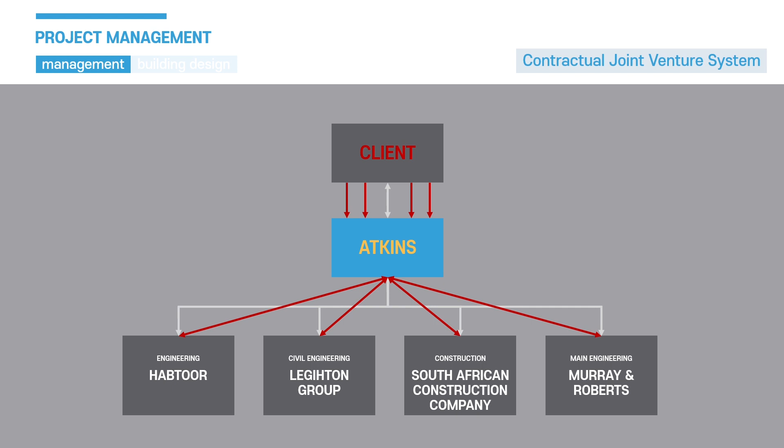However, the client is not only involved in the construction process through Atkins, but also in other joint ventures individually. This causes the scope creep phenomenon. Scope creep refers to how a project's requirements tend to increase over a project life cycle. The client wanted it to be completed before the year 2000, so the architect wanted the same. But if scope creep occurs, it cannot. As the construction period was set, it could have a huge impact on completion.

The second is about realization of design. Architects have knowledge of basic structure, but it is sometimes difficult to actually calculate and design the form. So architects and engineers must constantly compromise on this issue. Because of its unique form, Burj Al Arab had a series of these problems during construction. The architect expressed the yacht in the simplest form.

In the initial model, there was a high probability that the shape of the structure would be modified by wind. Therefore, it needed a structure to respond to wind load. Through consultation, architects and engineers implemented structures that can prevent wind load deformation and rooftop structures that can maintain them. The design is based on the frame that holds the sail of the yacht.

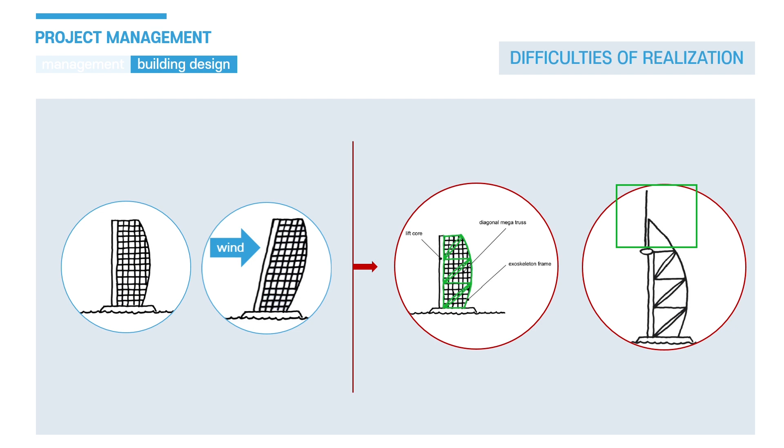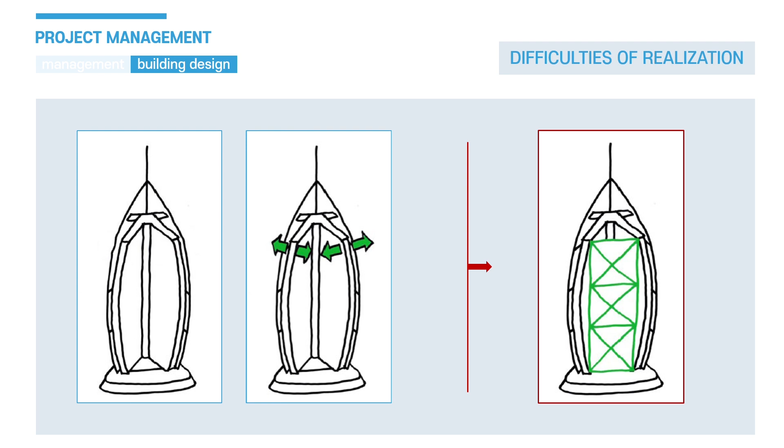The front part of the building was also implemented in a simple form, but it also threatened to deform because of wind load and the weight of the building itself. Therefore, the rear bracing frame was installed to stabilize the structure.

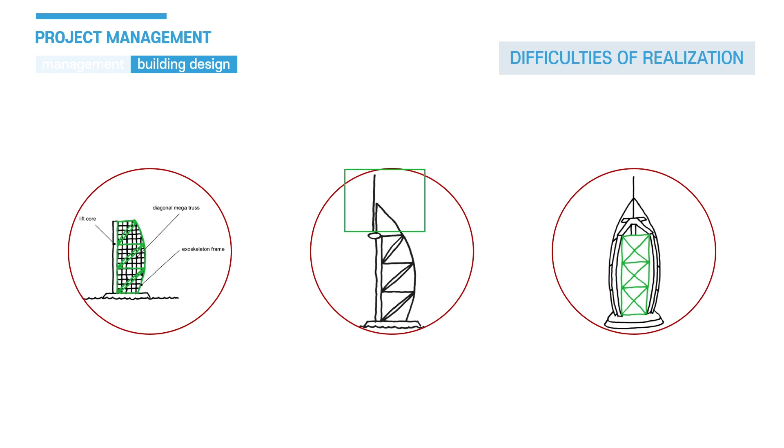As shown above, intuitive problems could be changed by modifying the design prior to construction, but most couldn't. There are many other problems while explaining the construction process during this semester. But Burj Al Arab's construction period was not enough, so Atkins used the fast-track method. To solve this problem, the architect used the fast-track method.

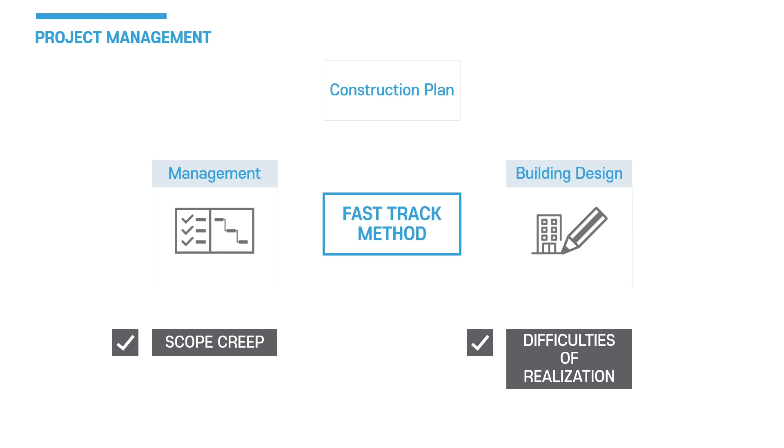Fast-track method is a construction method in which the design drawings are not completed for the purpose of shortening construction period, and the next stage is designed and construction is carried out according to the completed design. Originally, after the basic design, problems are corrected to complete the design, and then construction begins. But fast-track method is to perform main design and construction simultaneously.

Due to the lack of construction time, Tom Wright needed to work on it first and then design and construction at the same time. Fast-track method is effective in reducing construction period. It is also a good point of view to look at the use of fast-track method in the actual construction process. Now let's move on to the construction part.

Construction started with building the artificial island. Constructing the island had three major problems. First, the architect and the engineers clashed over whether there must be an artificial island or not. Eventually, it was built following the client's decision. Second problem was the danger the island had.

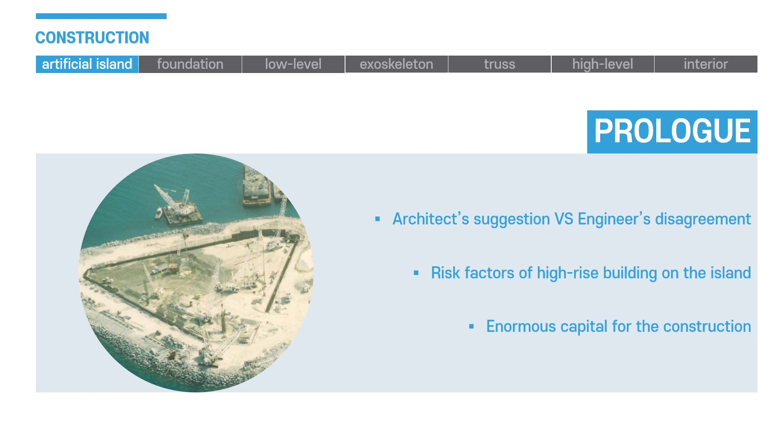Building an artificial island 207 meters off the coast and building a high-rise hotel on it had lots of risk factors, such as the destruction caused by either a wave or the structure. Lastly, they needed an enormous amount of money. Building the artificial island cost 3 years of the total 5-year construction period, starting from 1995. The island is constructed 207 meters offshore in 6 meters deep water.

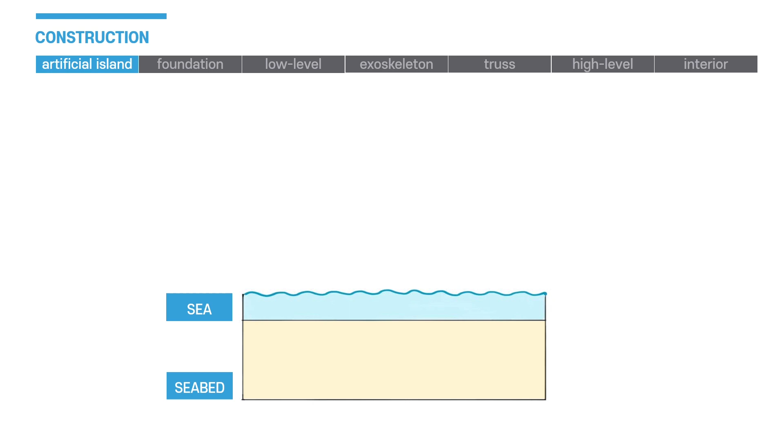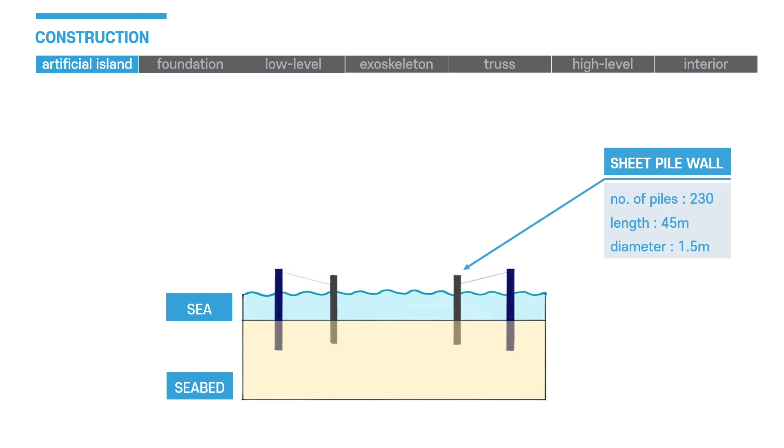First, tubular piles were inserted. Then, 230 pieces of sheet piles were inserted on the inside area where the tubular piles stand. These sheet piles have a length of 45 meters and a diameter of 1.5 meters, and they form a wall of the shape of the island. The sheet piles are held up by connecting them with the tubular piles using the cables. Sand was used to fill up the island inside the sheet piles.

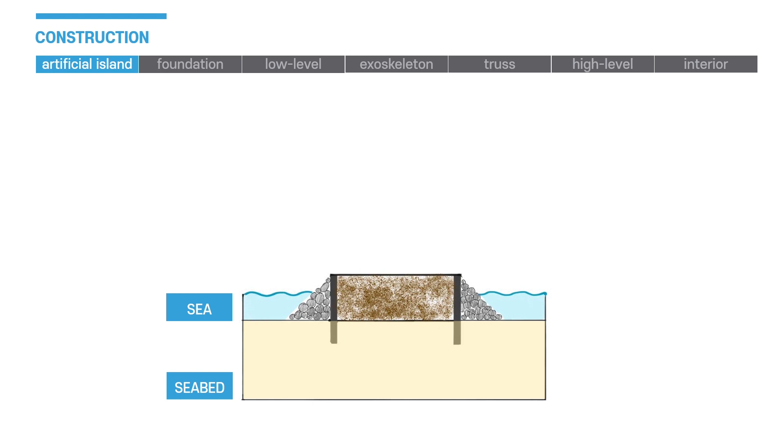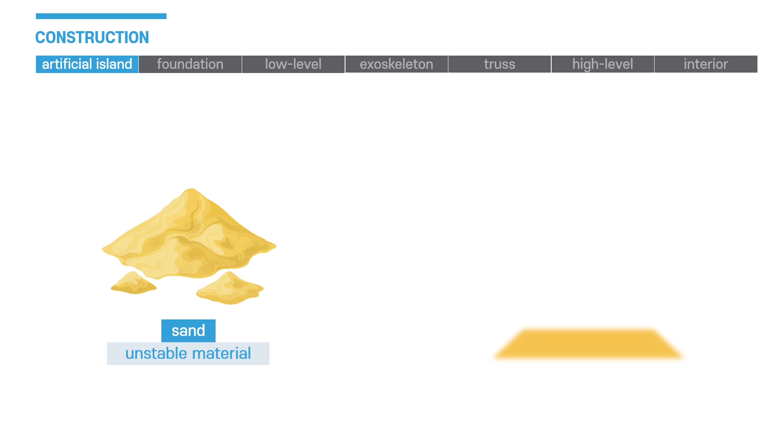Rocks were placed around the outside to protect the structure. Once the rocks were in place and solid, the temporary tubular piles could be removed, and the foundation for the artificial island is done. Now the problem is that the material they used for the foundation was sand. Sand is a very unstable material. The engineers had to build an island out of this unstable sand and build up a 321-meter tall building.

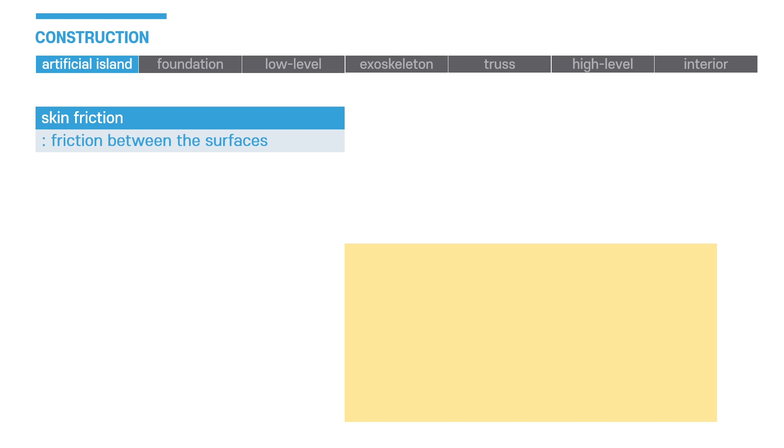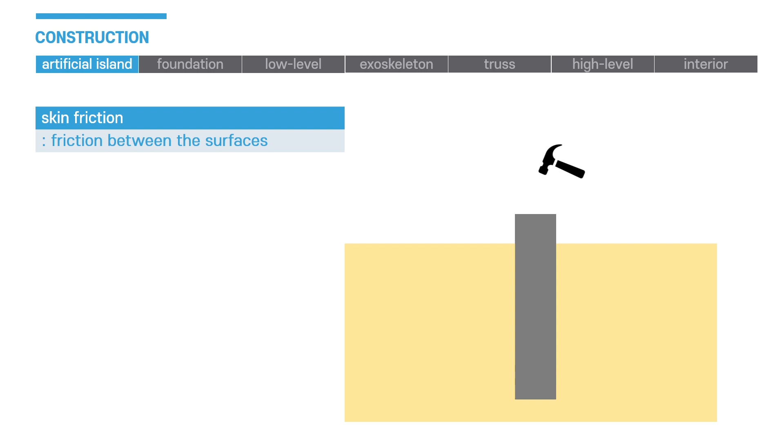How was that possible? Burj Al Arab was able to stand solidly on the sand island by the principle of skin friction. Skin friction happens when skin and skin meet and generates heat. Simply told, it's a friction between the surfaces. When you insert a concrete pile on the foundation made of sand, the surface of many grains of sand meets the surface of the pile.

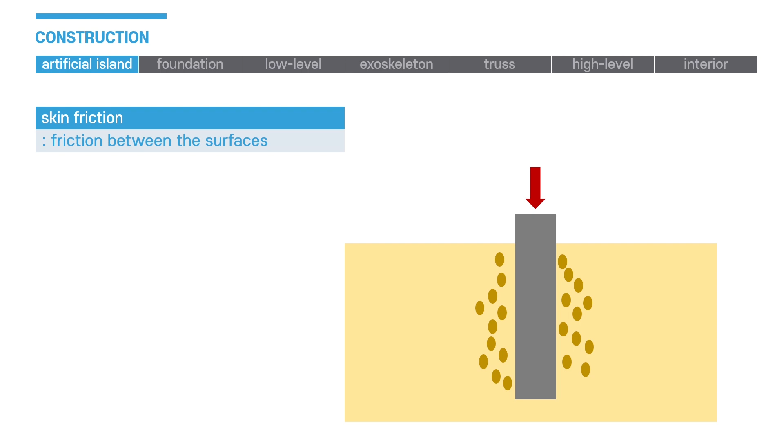As the force continues to be applied and reaches a certain level of pressure, the force applied is balanced between the sand grains and the friction between the piles. Numbers of piles and sand and the friction between them was the reason the 250,000 tons of Burj Al Arab could be built on the artificial island. Up to now, we have looked at the problems of the initial contract phase and the problems that occurred during the foundation construction of the artificial island.

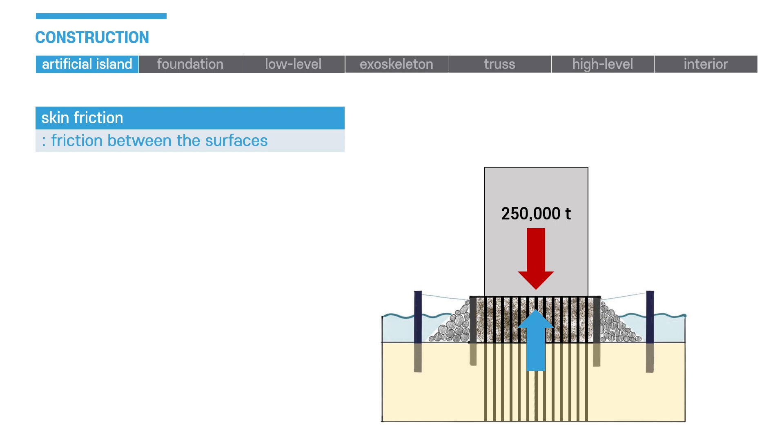In our next presentation, we'll be studying the problem of the artificial island's height. Dubai has high waves because of a strong wind. How did architect Tom Wright, who wanted to lower the height of the artificial island and let the guests get closer to the sea, and the construction engineer, who wanted to raise the height for the safety of the guests, solve the problem? We'll talk about this in our next presentation.